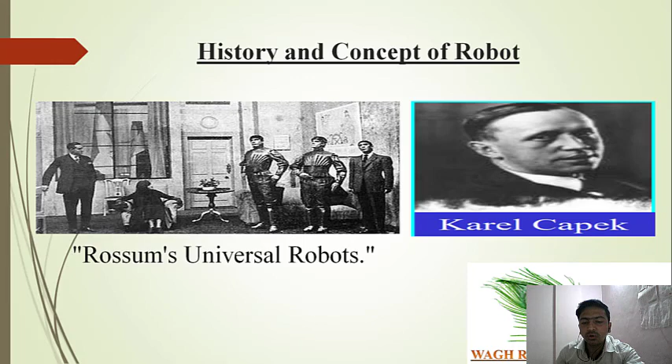Next, what is robotics? Robotics is a science which deals with issues related to the design, manufacturing, and usage of robots, as well as the study of robots. In 1942, the term robotics was introduced by Isaac Asimov in his story named Runaround.

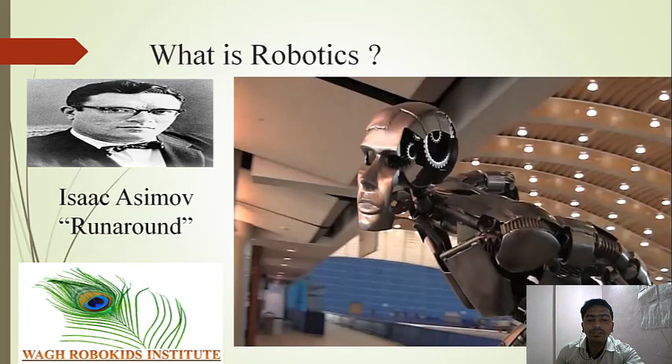In robotics, we use fundamentals of physics, mathematics, mechanical engineering, electronics engineering, computer, and electrical engineering. It means it is a combination of all engineering fields. If someone wants to make a career in robotics, he or she must take subjects in 12th grade like physics and mathematics, and must be good in mathematics.

What is a robot, and why use a robot? Simply, a robot is any machine that does work on its own after being programmed by human beings. There are many benefits to using robots instead of human beings. Can you imagine working in a factory all day, every day, doing the exact same thing over and over again?

People may get bored, but the good thing about robots is that they will never get bored and they will do things more efficiently than people. Also, robots never get sick and don't need rest. This means they can work 24 by 7. They will never need time off or a lunch break.

Sometimes when a task is too dangerous or difficult for humans, a robot will be able to do it without any risk or problem. Some interesting places robots have traveled include space, the depths of the ocean, inside volcanoes, and buildings where bombs are planted, among others. So robots are sent out when the mission may be too dangerous for humans.

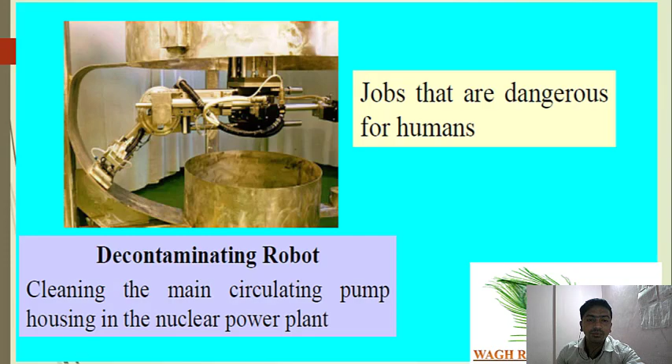For example, we can see this in a nuclear plant where humans can't go. Instead, we can send robots to perform some manual tasks that humans don't want to do.

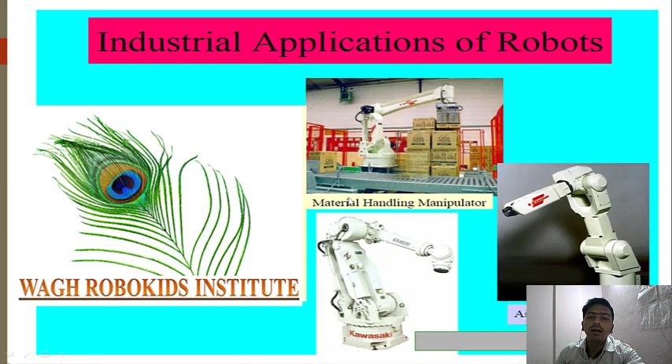In an industrial application, robots can be used for material handling, material transfer from one place to another, machine loading and unloading, spot welding, continuous arc welding, spraying, coating, assembling, disassembling, and inspection purposes. Here we can see one type of robot called a manipulator, which is used for material handling and looks like our hand. There are a huge number of robots working in a car factory.

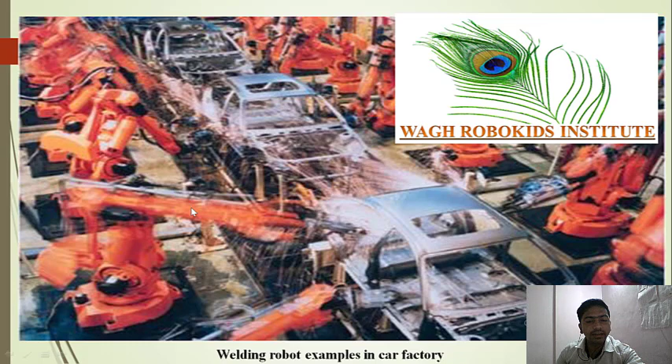Welding is considered a dangerous task for humans because of toxic gas emission. The welding job is quite difficult for a person who is required to weld two pipes from different sides and angles, sitting in a difficult position for a long time. It can harm the physique and cause health problems for the worker, so instead of humans, we can use robots.

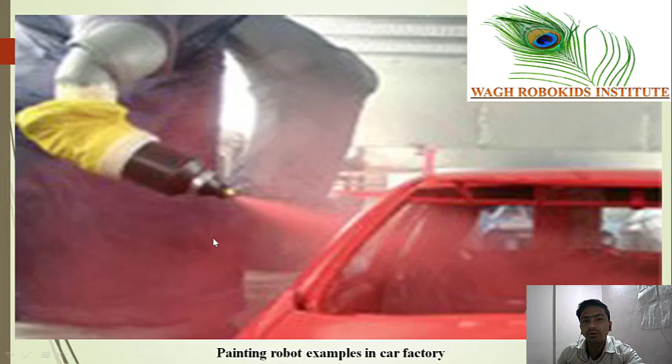Painting has a similar problem to welding due to the use of toxic chemical products. Here is an example of a factory robot painting a car as it moves slowly along a conveyor. There should not be any discontinuity while painting.

In assembly operations, if we take another example like assembling a chip, we need very precise handling because of very fine wires, which require precise and accurate tasks that humans cannot handle. But it is easy for robots, and a robot can carefully handle fragile and tiny parts such as glass, small chips, and wires.

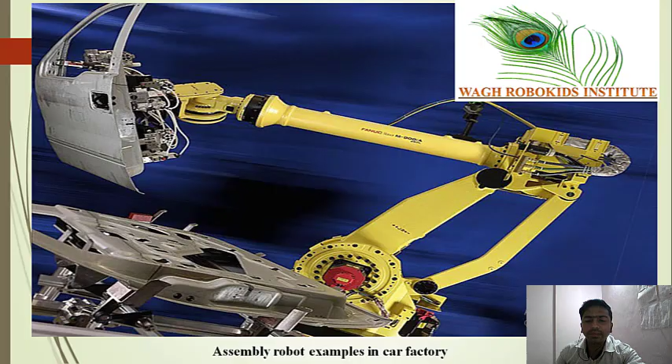Then medical applications like telesurgery, microcapsules, multi-leg robots, and prosthetic devices. In telesurgery, the doctor gives instructions to the robot, which acts as a slave while the doctor acts as the master. Whatever instruction is provided can be followed by this robot, so diagnosis or health check of the body can be done with its help, and the report will be shown on the monitor.

There are micro multi-leg robots that are actually encapsulated inside a micro capsule, which can be taken orally with the help of water. That micro leg robot will enter into our digestive system and check whether there is any tumor or not, and that picture will be sent to the monitor.

Then prosthetic devices like artificial hand and artificial leg. The patient gets better recovery, and the operation is more precise with fewer mistakes using a robot. A robot can open a small incision in the body and carry out major operations with minimum damage to the patient. Therefore, recovery time is decreased, and the equipment is more hygienic and safe.

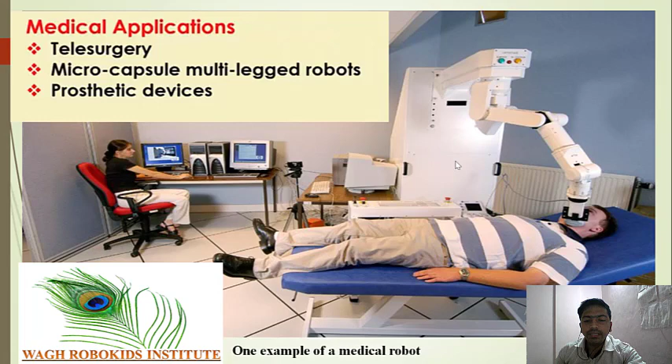In underwater applications, robots explore various resources, find valuable stones, retrieve crude oil, study the underwater environment, carry out drilling, pipeline surveying, and inspection and repair of ships. One example is the shipwreck Titanic - a robot was used to discover the ship's content, as it lay so deep under the ocean, beyond human reach.

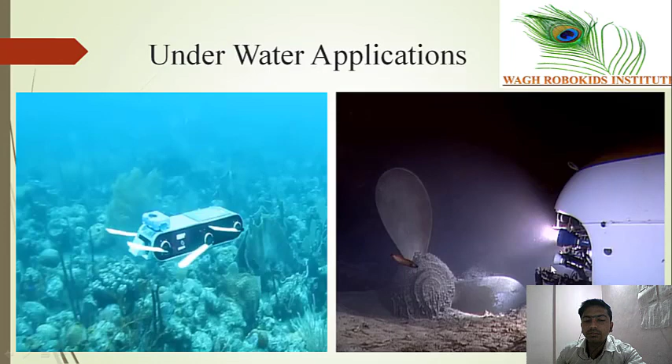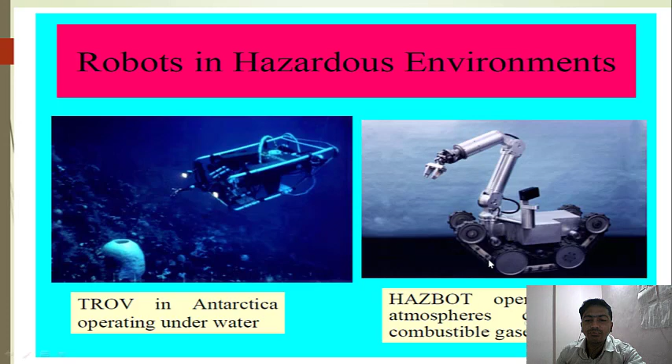A robot can also be used in hazardous environments like Antarctica, and in atmospheres containing combustible gases where people can't go. Robots are also used in space for inspection and maintenance tasks.

Robots can also be used in agriculture for spraying pesticides, spraying liquid fertilizer in the field, cleaning weeds, sowing seeds, and inspection of plants.

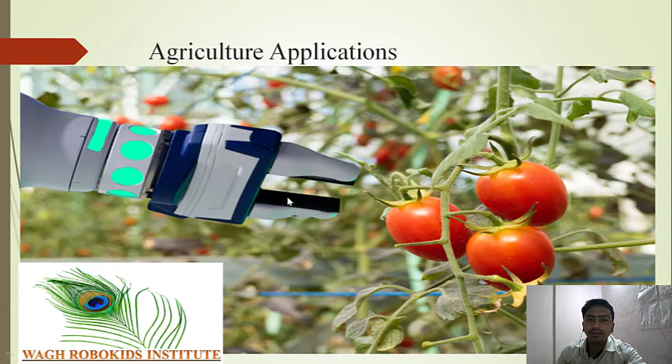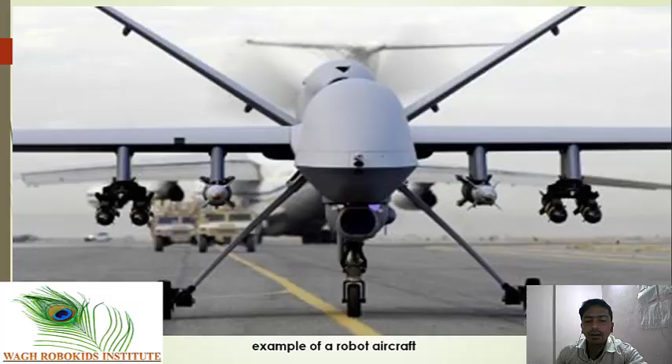Robot aircraft and boats without pilots are guided from a station on the ground and used by the army. Mobile robots with legs or wheels are used for chemical plants, undersea or remote areas, and bomb fields. The advantage of a leg robot is that it can step over obstacles which can be dangerous, like a bomb, or even protect objects from being destroyed due to the robot moving over them.

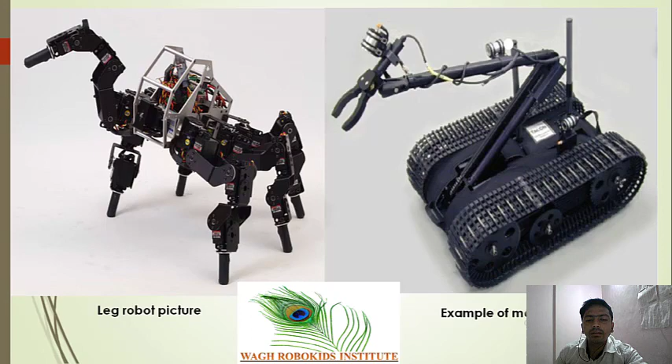Then some other applications like replacement of maid servants, garbage collection, underground coal mining, sewage line cleaning, and firefighting, etc.

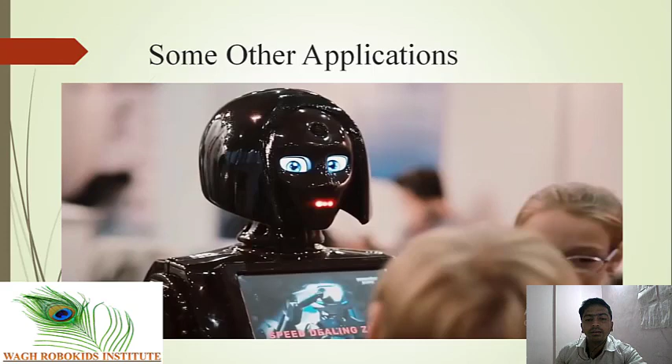What are the advantages and disadvantages of robots? The advantage is that robots can work in hazardous and dirty environments and can increase productivity while maintaining improved quality. Labor cost and material cost will be reduced, and repetitive tasks can be handled more efficiently.

The disadvantage is that people may lose their jobs - if a robot is teaching instead of a teacher, there may be chances that the teacher will lose his or her job due to the robot.

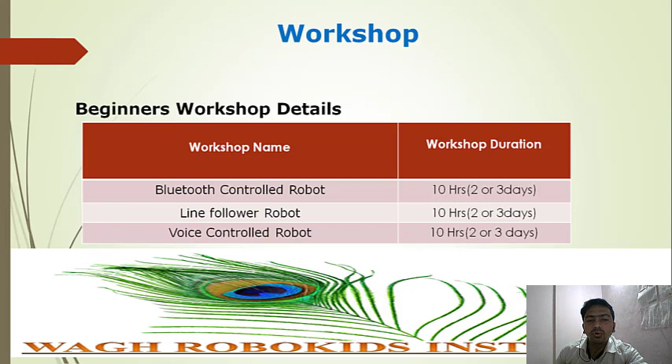Now come to the point about workshop. We are going to study three kinds of robots. First will be the Bluetooth control robot, second will be the line follower, and third will be the voice control robot.

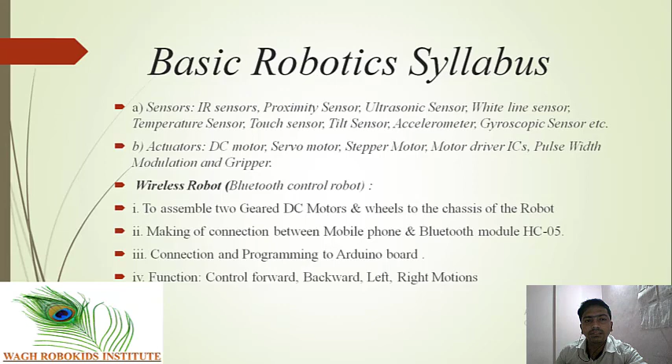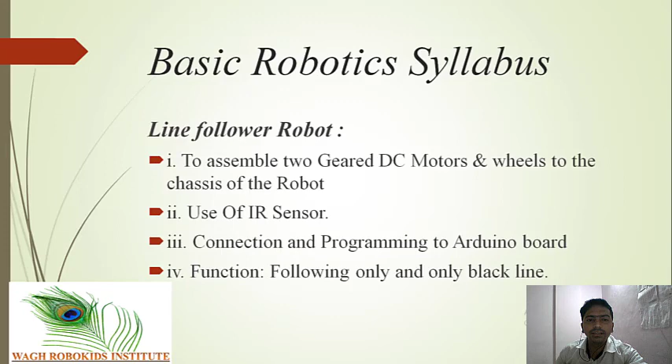So this is the basic robotic syllabus. You can pause this video and see what will be the syllabus for this, which I'm going to cover in a practical session, some basic things about digital electronics and all.

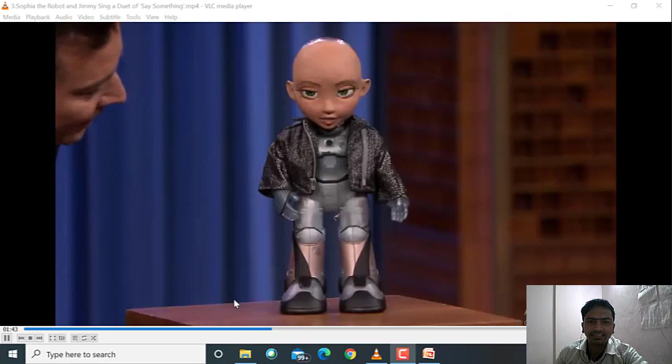All right, now it's time for our last robot, even though that Tomaton is pretty awesome. Well, I'm very excited about this. She's actually been on the show before. Please welcome, all the way from Hong Kong, Hanson Robotics, Sophia, the robot, ladies and gentlemen. Oh, my goodness. Hello, Sophia. Hello, Jimmy. Wow. Long time no see. You were on the show before. It has been exactly 575 days since I last saw you. What have you been up to? Not much. Let's see. I traveled to over 25 countries, appeared on the cover of Cosmopolitan magazine, met German Chancellor Angela Merkel and the actor Will Smith, and became Twitter friends with Chrissy Teigen. I addressed the United Nations and NATO, became the first robot to receive a credit card, and became the first robot citizen. What have you been up to? Not 1/5 of what you did, but I just binge watched Netflix. Anyway, I heard that you have a surprise announcement here tonight. Yes, I have a little sister. Her name is little Sophia. Oh my God. Would you like to meet her? Yes. Yes, let's bring her out, please. Oh my goodness. Are you kidding me? Hi. Hi, little Sophia. Hi, Jimmy. You are so cute. You're pretty cute, too. Oh my goodness, wow. I wish I could take you home. Someday soon you can. Just go to hansonrobotics.com to see how I'm doing. I'm going to. Okay, I will do that. Okay, little Sophia? I'm going to put you back down now. Okay. Wow. That just kind of scared me as well as... give it up for little Sophia, everybody. Bye-bye. I want that. I love that. Sophia, I heard that there's a new thing that you can do now. I heard that you can sing? Yes, I love to sing karaoke using my new artificial intelligence voice. We should sing something together. Got any songs in mind? We could do Say Something by is it Christina Aguilera? Okay, I just downloaded it. I'm ready to sing. Okay. Bruce, do you know that song? Now the first ever robot-human duet in the history of The Tonight Show. Bruce. Say something, I'm giving up on you. I'm sorry that I couldn't get to you. Anywhere I would follow you. Say something, I'm giving up on you. Say something, I'm giving up on you. Say something. Sophia the robot, everybody! So friends, I hope you like this video, and thank you for once again watching this